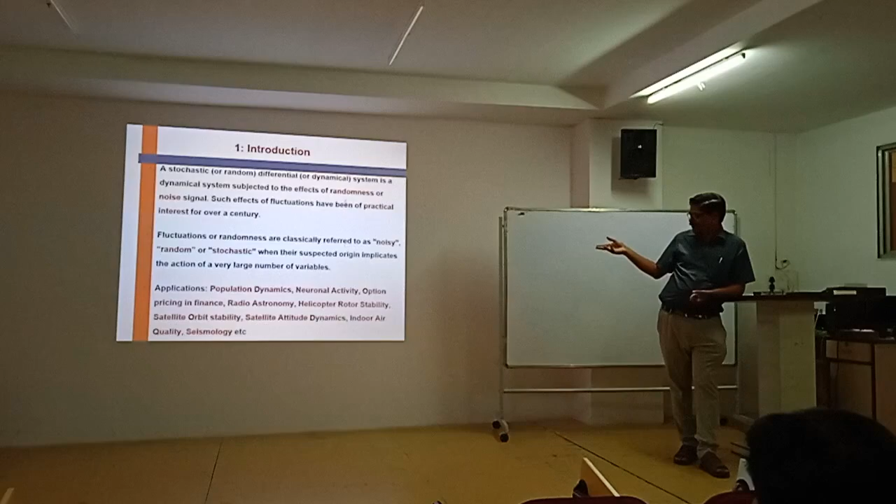Okay, maximum is pricing in finance. Other than that, all are technical, maximum technical things are there - astronomy, satellite, air quality, seismology, helicopter rotor, this thing. When anything related to finance comes, a person or human first attempts that or gets attracted towards finance. We are also there, we are also human beings, so we are getting attracted. So the first time there was fluctuation in the stock market.

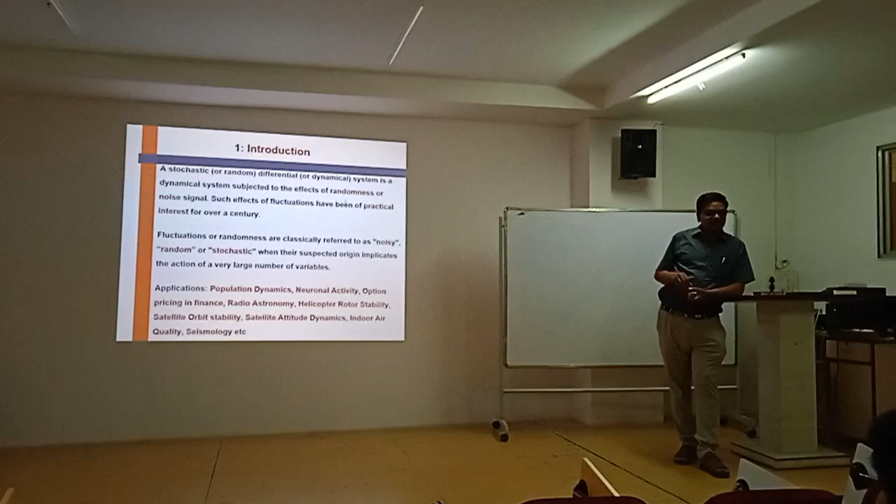So for predicting what will be the situation of Tata Power, suppose, or Tata shares in 5 years, depending on the previous fluctuations, one can estimate or predict this share will go to this and this value, from 900 to 1100 or 9000 or whatever. So again there is statistics, there is probability, everything comes along with this noise. And fluctuations are what? The variation around, suppose policies getting changed in India, or industry-related things getting changed, or leadership in Tata getting changed - these are all dynamical things which are disturbing the share market prices.

Are they right? So the first time this stochasticity was tackled or solved was by the Black-Scholes equation. Black-Scholes equation, and that got a Nobel Prize.

That equation is very popular to solve or to predict the share market prices, and that was analyzed by Black-Scholes. But the same thing was not done in technology because it involves very critical signals, but we have avoided that for many years.

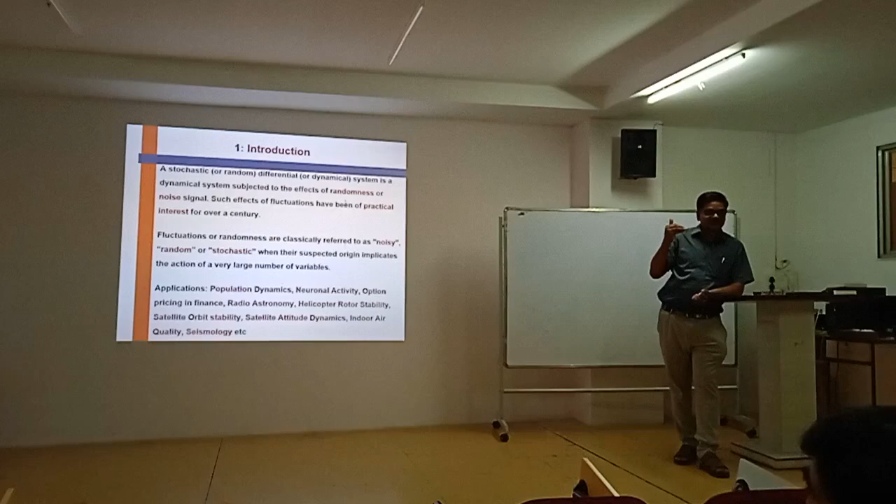And foreign people have attempted non-linearity, randomness, noisy signals from the first day only, because in their syllabus they are free to teach anything. On the first day only, they will say everything is non-linear, so try to solve. At least they are getting knowledge of basic things, and we have run away from them.

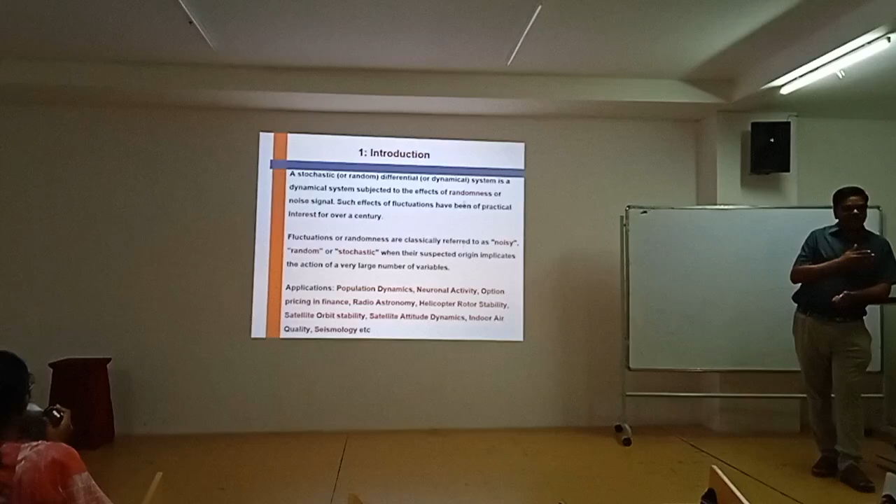Still, if you count, I don't know, hardly 20 or 30 people are doing research on this randomness in India. If you take the electrical community, when we were attending conferences, very few people were there. And in actual industry, people were working on noise.

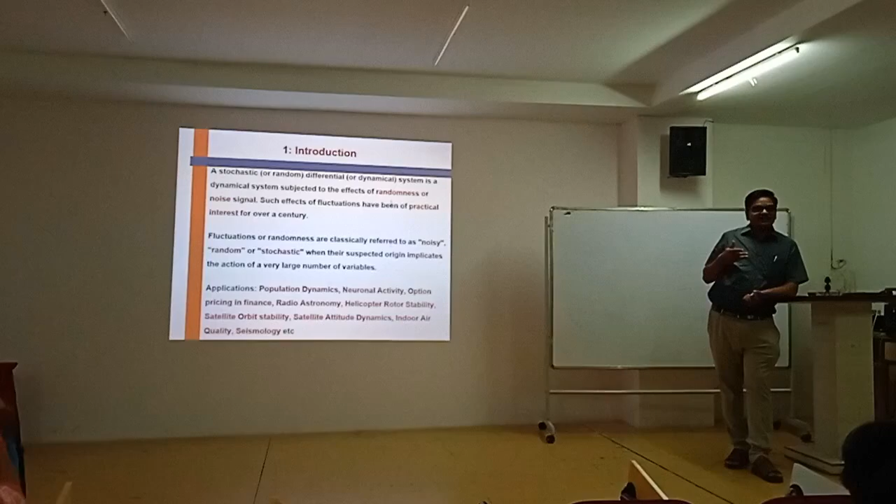Take an example: today also we are coming by car to the office. When high voltage lines are there, our FM radio is getting disturbed even today. Despite many electronic engineers being produced by India, they are going abroad. Still we are unable to solve this problem. Have you observed this? Yeah, still it is noisy. When we cross a high voltage line, the FM output gets disturbed.

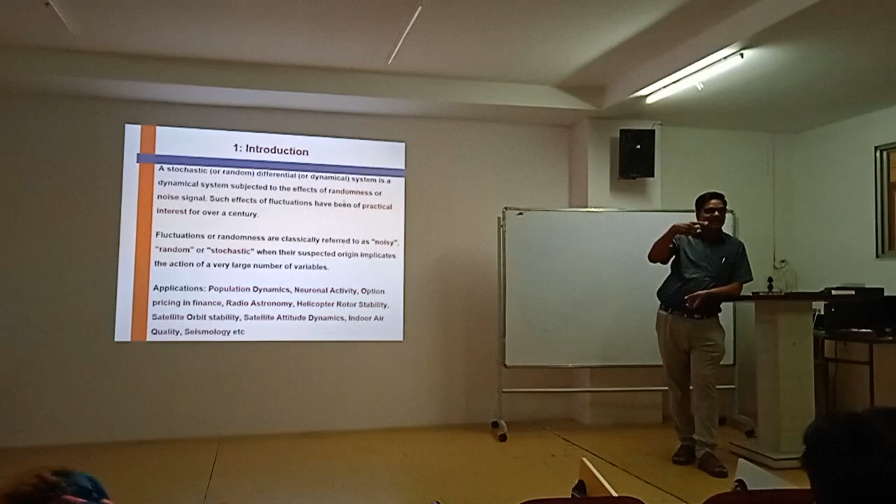Why is it so? We have not taken care of high voltage electromagnetic interference while designing the radio system, MOSFET based. I am going to cover one small topic on that. One paper was written on that MOSFET gate signal disturbance. So that challenge you have to take.

And what does industry want? How you are helping them to solve their problems. Here in teaching, faculty just have to complete the syllabus and all that, and our salary is getting deposited every month. But when students go, industry checks whether this person is helpful or not. Isn't it?

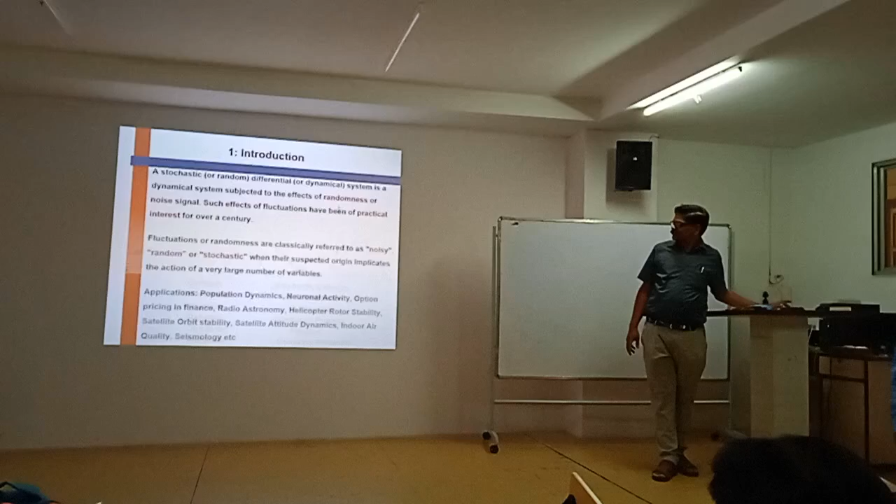Now on the deterministic signal, you can easily apply differentiation, integration. If it is discrete, then it is probability distribution things. If you take stochastic, then it requires Ito differentiation, Ito integration, then stochastic process with measure and probability. Something different. Now what is this Ito? Then more words will come: Stratonovich, Markov, Kolmogorov. Many scientists have attempted, but no one is from India. Ito is a Japanese scientist.

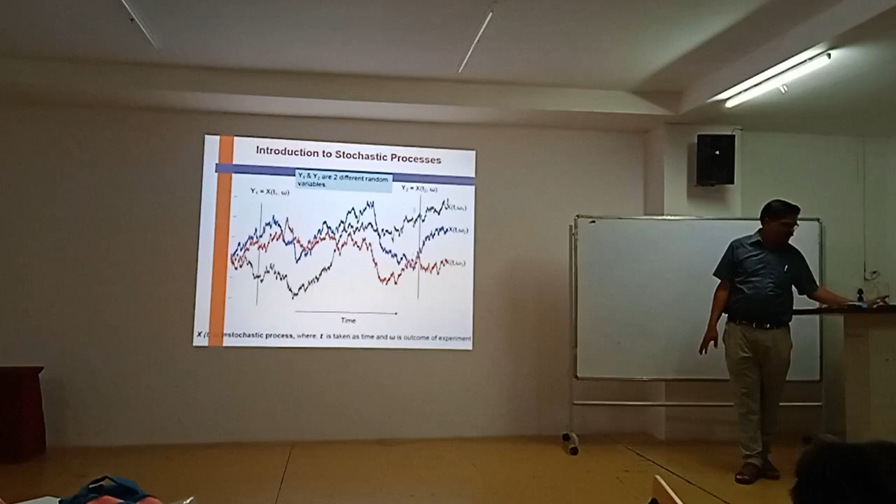Random variables. Now, check one book, Probability, Random Variables by Papoulis. In that you will find all this. That is the basic book behind this particular subject. It is basic in probability. This is the historical development.

Importance of randomness first. Introduction of the concept of Brownian motion, named after biologist Robert Brown. In 1820s, he noticed motion in tiny particles suspended within the medium of living pollen. I will give you a simple example. At night, a street light is focused in some shape, but you will see small particles moving. Whether that particle movement is linear or in a particular format, going straight, it is random. You can easily visualize it.

He had the same fundamental. So you will find that one particle will have a random travel path. It may turn right, it may go down, it may go up. Where it will go, we don't know. So that is the basis behind Brownian motion.

Then Albert Einstein worked on Brownian motion in 1905. That was just an observation that the motion is random, and it is called Brownian motion. Because something should be there, and on that the next one will start. So Albert Einstein in 1905 worked on Brownian motion as part of his kinetic theory and also on transition probability density theory.

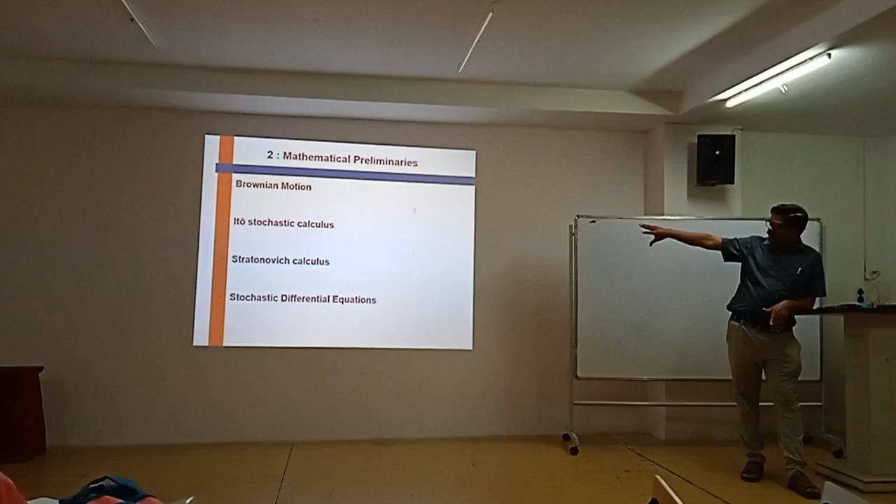This is mathematical, but I will show a picture of how SDE is developed, like linear differential equations, how SDE is formed. Brownian motion is the base. Then stochastic calculus. Then Stratonovich calculus. Stratonovich developed a somewhat different calculus than Ito. Most things are the same, but some formulas, the table, are different. And then last is stochastic differential equation. For solving this SDE, we can use Ito or Stratonovich. Those are the available methods.

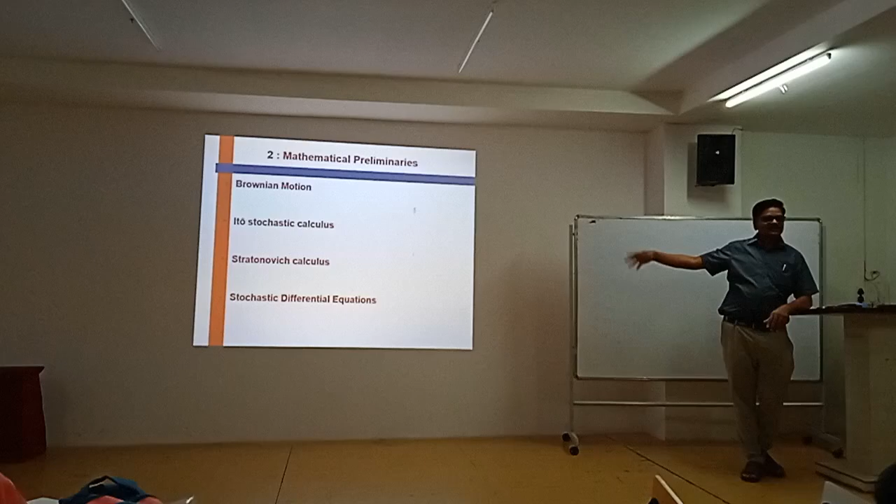This is again some mathematics. Brownian motion is the unique process with the following properties. No memory, means nothing is stored in it. So if you take B(t1) minus B(t), the next difference with the previous one, they are independent. Those small distances you can check, B(t1), B(t0). That is Brownian motion. Then invariance: the distribution depends on the gap time t. And continuity. These are the properties of Brownian motion.

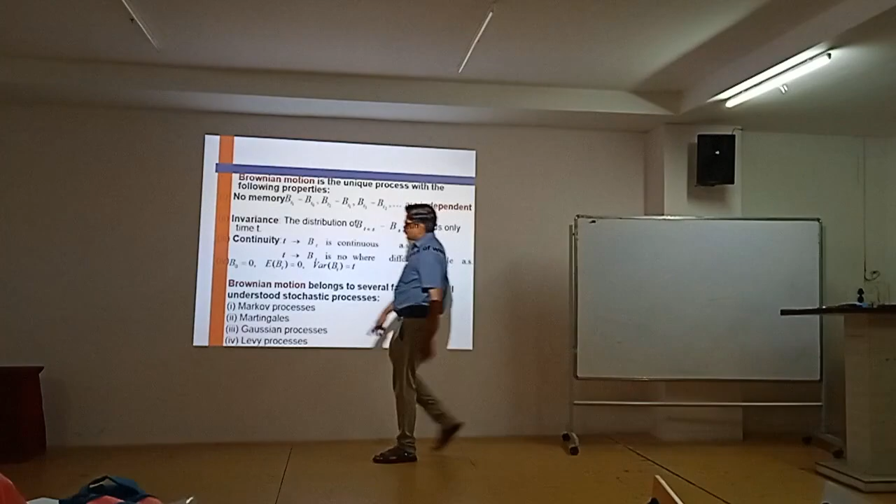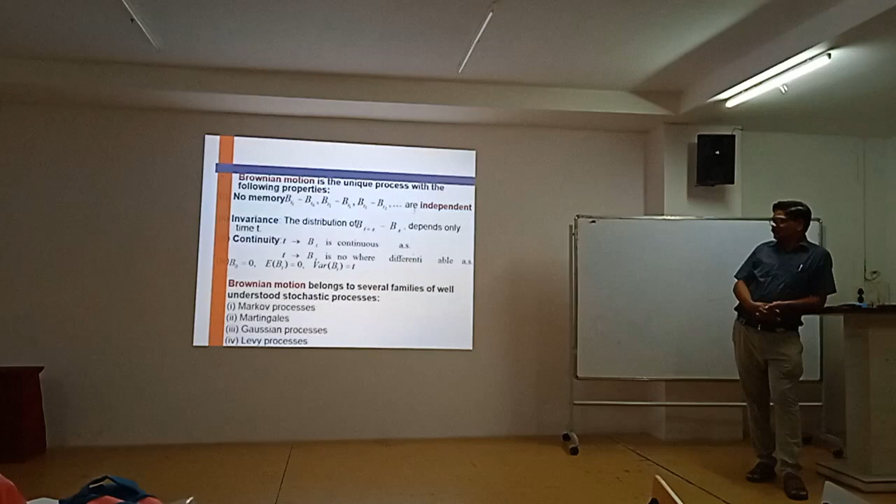It is very important. B0, the Brownian motion initial point, is 0. Then the expected value of Brownian motion is 0. The variance of Brownian motion is t. This is the base for solving those particular equations. Now Brownian motion belongs to several families of well understood stochastic processes. You have heard of Markov processes. Gaussian process is very famous. Have you heard of Gaussian process? In probability theory you might have heard this. Then Levy process.

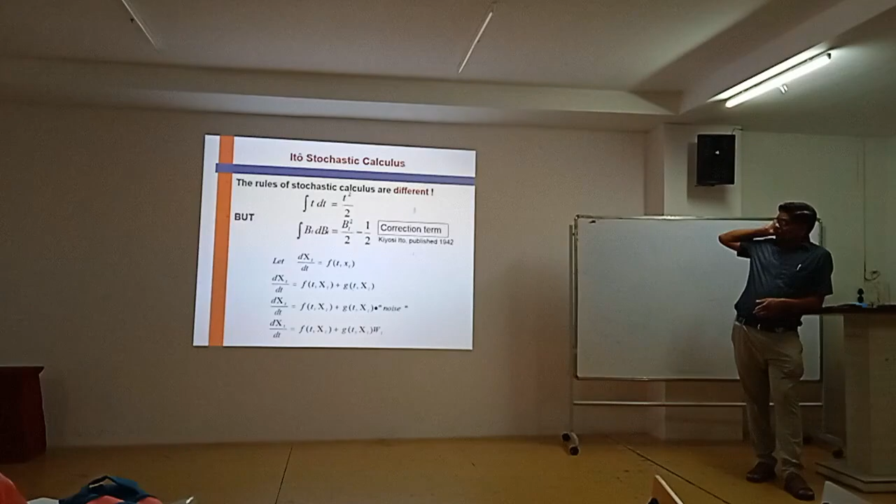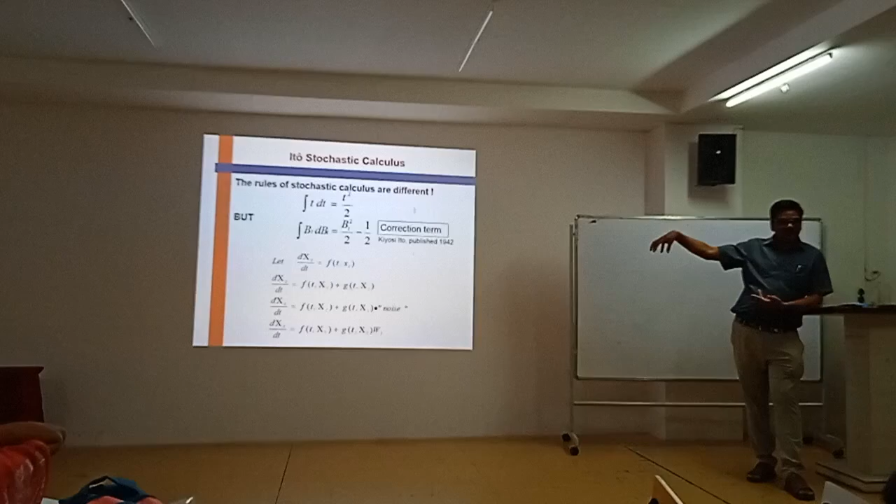Now it is Ito stochastic calculus. The rules for stochastic calculus are different. As I said, if you take the integral of t dt, then it is t squared by 2. But if you take B(t) dB(t), it's with reference to Brownian motion. Because what is the base for our stochastic calculus? Brownian motion. Brownian motion is related to randomness of anything. We have to take anything with respect to Brownian motion. So that is B(t) squared by 2 minus t by 2. This is the correction term added by Kiyoshi Ito, and based on that the stochastic differential equation is formed.

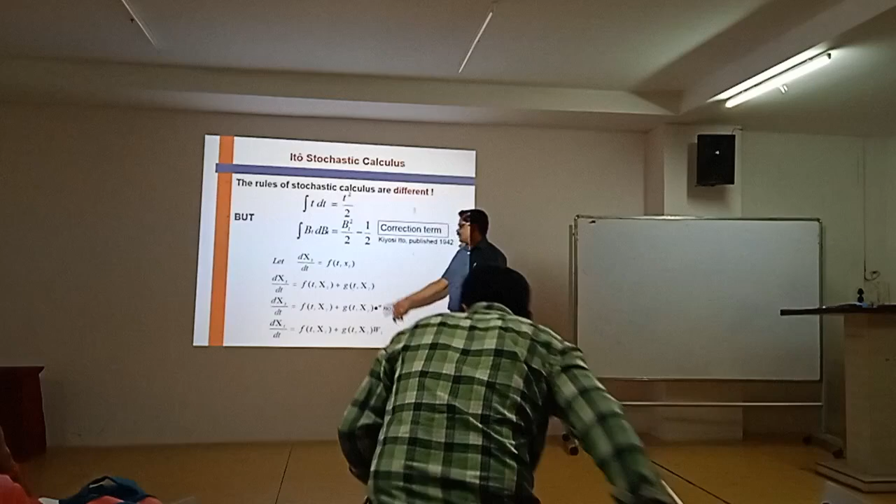If you take the derivative of any process xt, then that is a function of t comma xt, and then that is rearranged. If you take f, and this g of t is added, then dXt by dt comes in as f(t, xt) plus g(t, xt), and it is getting multiplied with noise. Noise comes in the picture. When noise comes in the picture, no one can apply conventional calculus. Our pen stops there. Any mathematicians that are interested go on, but everyone stops here only.

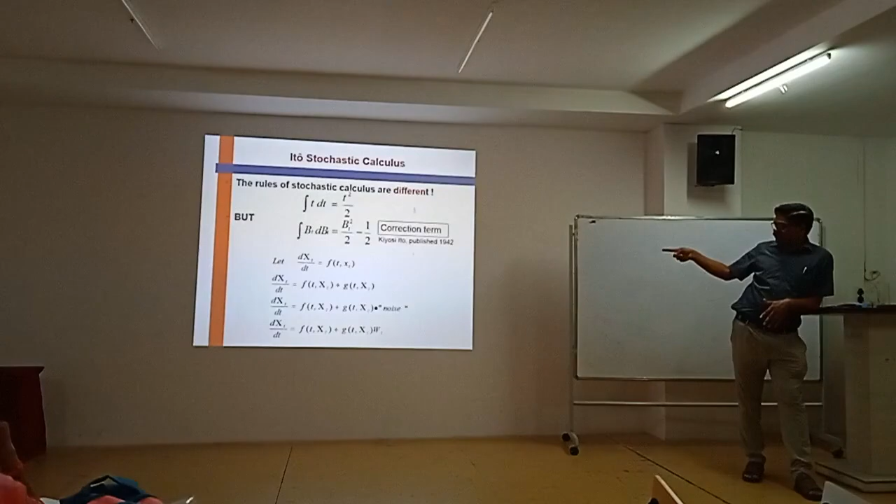And after getting this noise, it is getting multiplied. That is what we are mentioning with Wt. Now once that dt is on the right side, it takes this form: dXt is equal to f(t, xt) dt plus g(t, xt). The f and g are the coefficients. We are having a function of this. G is also a function, but the notation is given differently.

White noise, that is Wt, is the derivative of Brownian motion. Derivative of the Brownian process, dBt by dt, that is white noise, where Bt is the Brownian motion process. So dBt by dt is replaced by Wt, and if you replace that white noise Wt in dBt form, then it is called dBt. What have we done? We have added white noise.

You are aware of white color and colors. White is the same, that is, having only one ray, white. Others are with different colors. They are having other things. Okay. Why are two functions there when you take that differentiation?

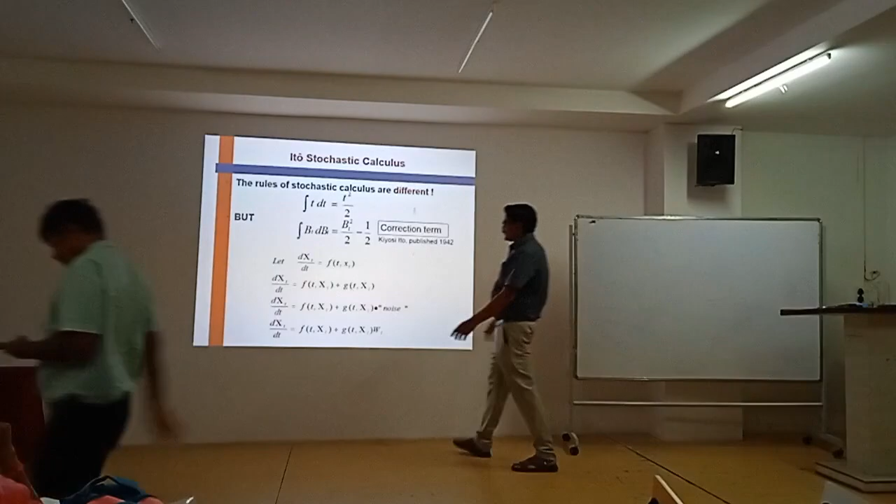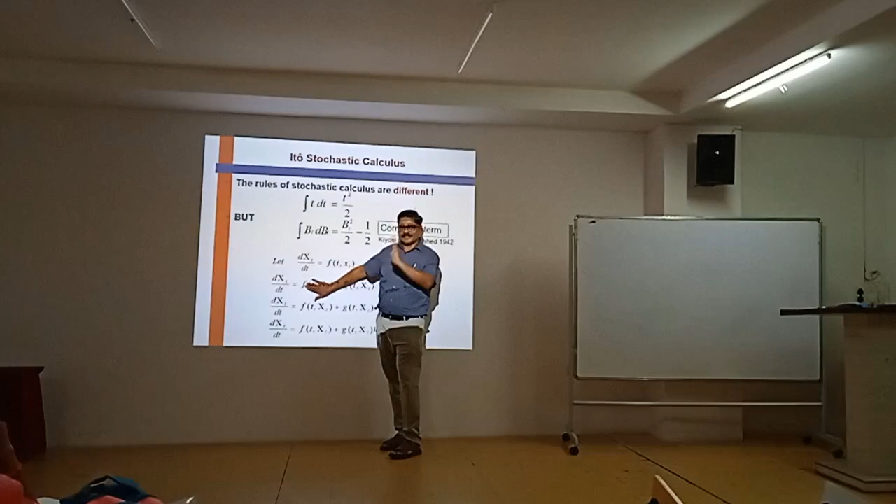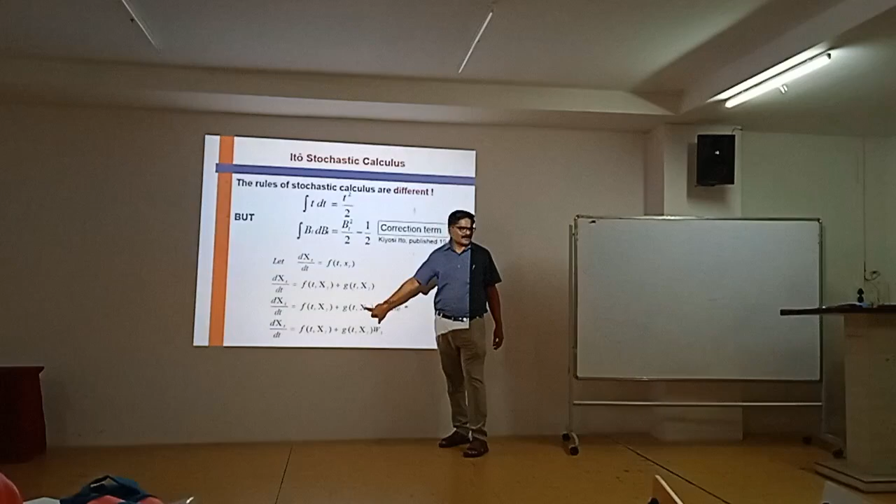Just see, there is a function. We have to take something which is affected by noise. This is the linear thing. This is one of the parameters which is linearly dependent. This relation is linear. But if you have to add something non-linear or noisy, where will noise come? If this comes, then this is 0. Some component will be without noise and some will be with noise. And to have a combination of both, we have this second function where noise is related. All of you getting it? Here noise comes in the picture.

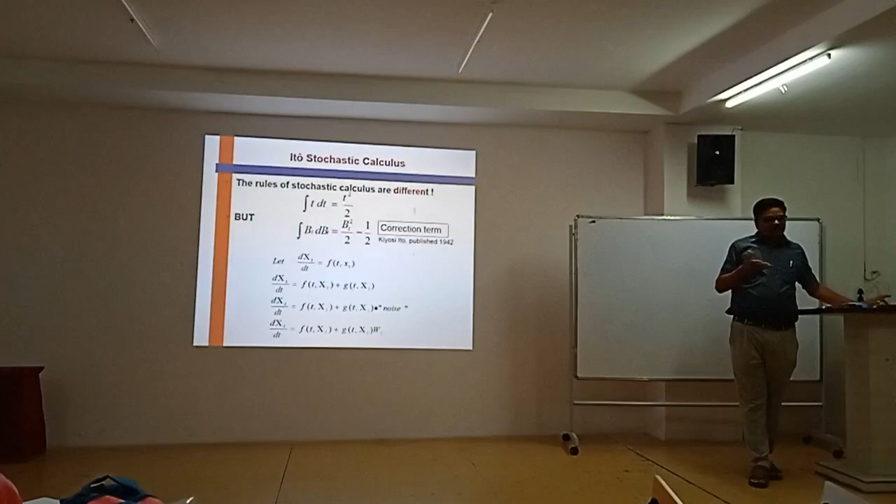So we are considering white noise with a single frequency, you can say. For example, if we are taking wavelength, then it is a single one. Is it clear? Many times the first function comes as 0 also, because only noisy signals are there, only noise is there. So white noise is the derivative of the Brownian process, and that gets the reverse form. We are adjusting that dt on the right side. So Wt dt is replaced by dBt.

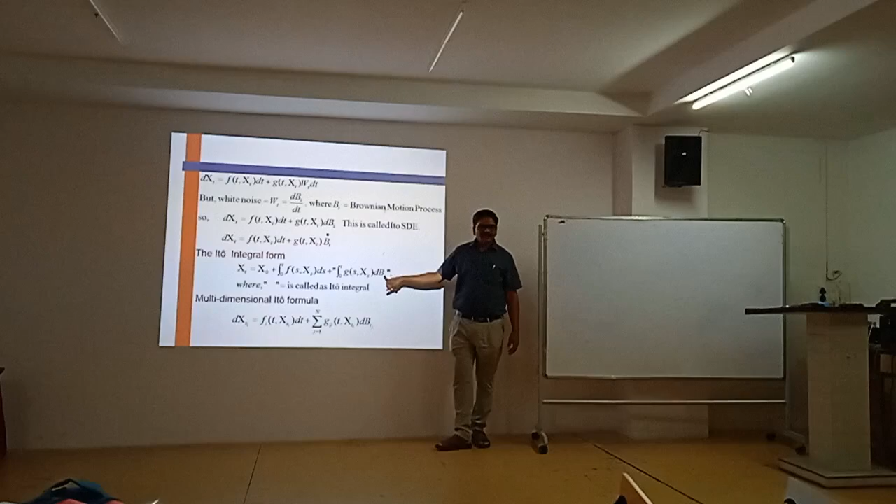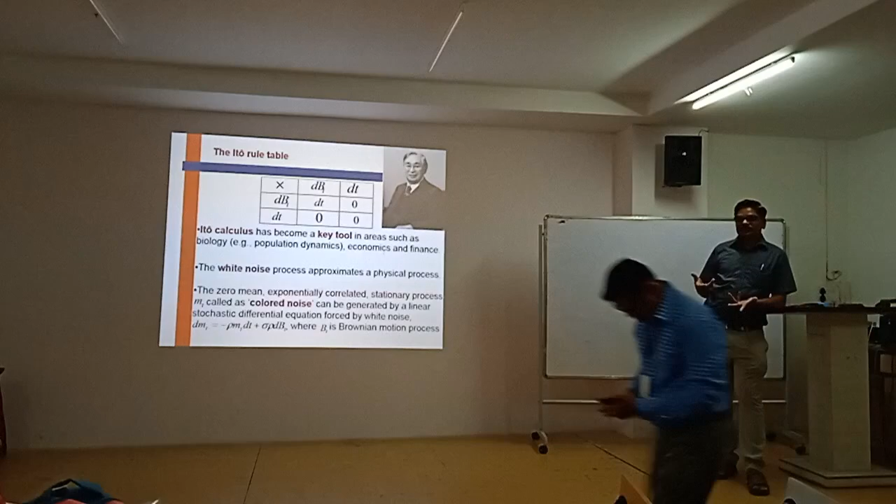Because dBt squared comes as dt, solutions come, and closed form solutions are possible. And then we are getting equations that are closer to our actual ones. We cannot say it is perfect, but at least it is better to consider these noisy signals instead of not considering them. It will give some randomness effect or various parameter effects on the system. Now this Ito calculus of Kiyoshi Ito has become a key tool in areas such as biology, economics, finance.

The white noise process approximates a physical process. Then a zero mean, exponentially correlated stationary process called colored noise can be generated by a linear stochastic differential equation driven by white noise. Again, white noise will generate the colored noise with different wavelengths. In practice, we call it that. Just like a prism: on one side of the prism one ray goes in, and then you are getting a spectrum. So this is white noise, the Brownian process, for colored noise.

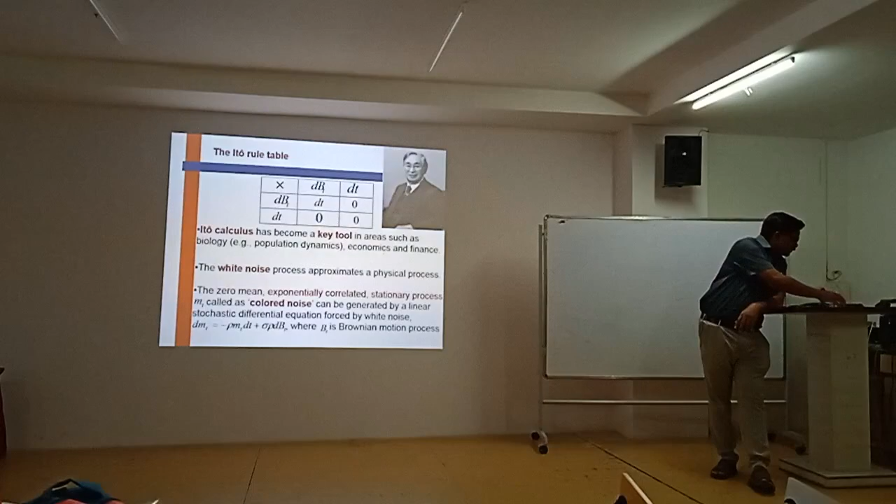Then again, one more scientist, this is Stratonovich. Like Ito, he has developed something different, and that is, he proposes a new symmetric definition of the stochastic integral. The Stratonovich integral is defined for a much more restricted class of functions than the Ito integral. Here in the evaluation, again, a small change is there. You will find Bt minus Ba is there. Again a small integral; he has considered that.

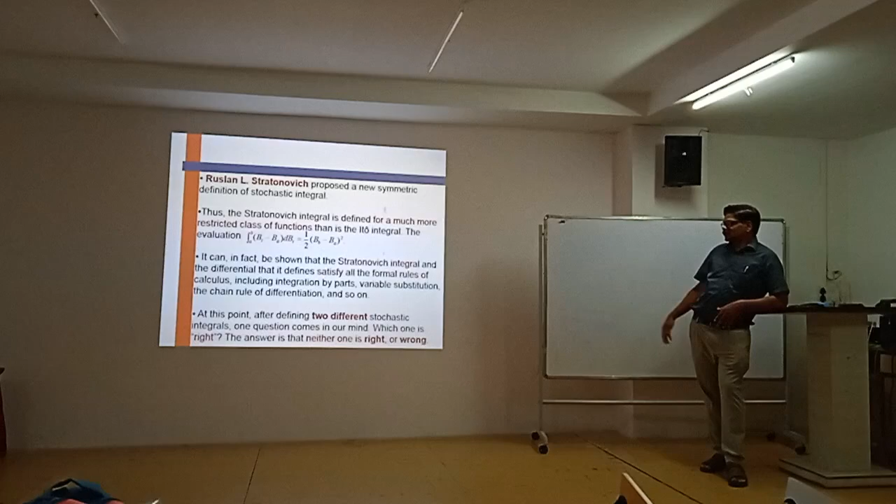After defining two different stochastic integrals, which one is better, or which is right or wrong? Both have their own merits and demerits. So some have attempted Ito calculus solutions, some have attempted Stratonovich. I will skip this, it is more mathematical. Just keep in mind the master equation, which defines the evolution of the conditional probability density for given initial states for a process.

You can continue with this because I have given them one discussion paper of Sharma Patil theory; they are aware of it. But you tell me, because we were also new at that time in PhD. Sharma sir is my guide. I was the second student, then he came, and then more students. So if you go through the paper in one reading, two, three, four, five readings, whether you are getting something, frankly speaking, it is very difficult.

Because only when the left hand side comes to the right hand side will you be satisfied, and only then will someone rely on you or keep faith in you. If you prove that the left hand side is equal to the right hand side, then people will salute you. Otherwise, anything I am talking, no one will believe. Because everything should be in mathematics.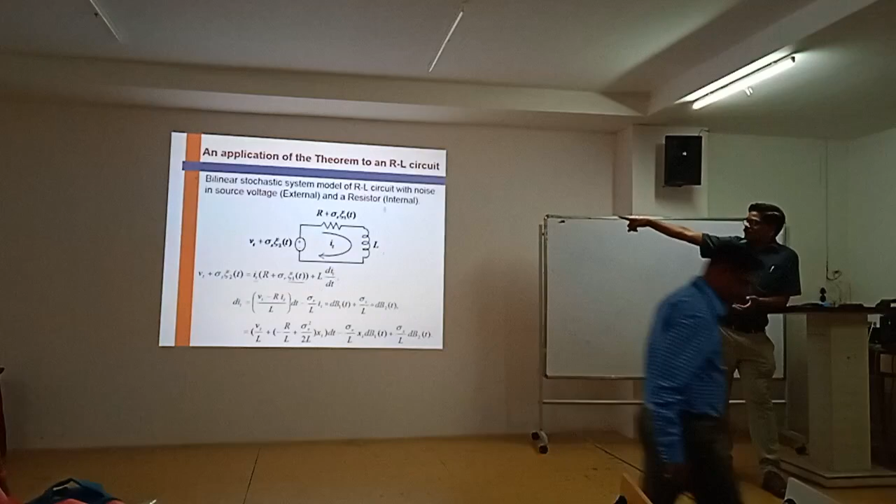So that we have considered as an internal noise, and the other is the source, because the source is also getting fluctuated depending on the circuit. We are not using very high and sophisticated sources, maybe our lab sources. If a battery is there, there is also disturbance of noise. So we have added this sigma s and sigma r. This is the coefficient for the noise strength, and zeta 1, zeta 2. This is added in r plus this. This is the variation. Okay, Vt plus this.

Now our simple Vt will get modified as Vt plus source noise, sigma s zeta 2. In the bracket, r is replaced by this variation, r plus sigma r zeta 1t, plus L di by dt. For the inductor, we are considering L pure, because at a time we cannot take noise in all components. We have to first take noise in the resistor, then by keeping the resistor constant we can go for inductor noise. So we are considering there is no noise, so L is pure.

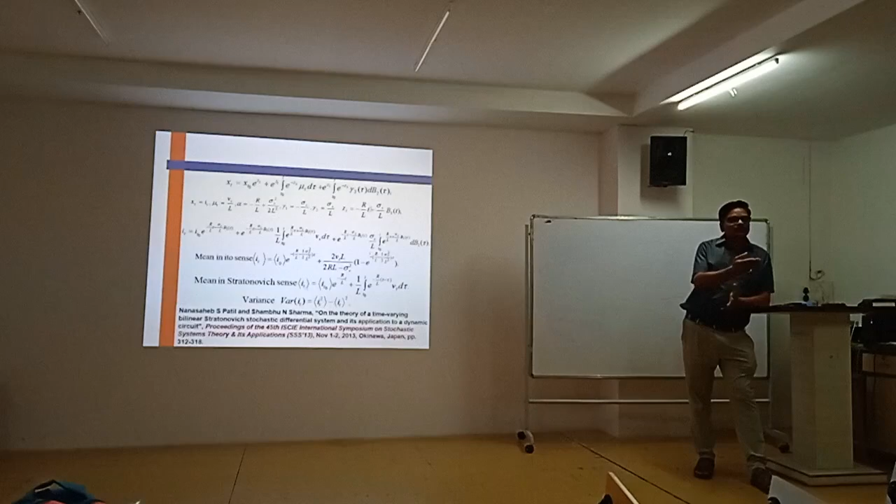Any doubt or curiosity on this circuit? This was my first attempt to solve something. When I entered research for my PhD, I was not able to pronounce stochastic correctly. So from that we came to this first formulation, and I applied this equation in MATLAB. MATLAB has all this toolbox; you can easily generate a random signal. That random signal, along with intensity, is given to the system, and that was simulated. So this is the analysis of the RL circuit.

Then another example is the electronic half wave rectifier, a famous one. Again we have considered here. This is a simple half wave diode circuit with one diode, a silicon diode, PN junction diode. This is conventional. Then again, when any parameter exhibits randomness...

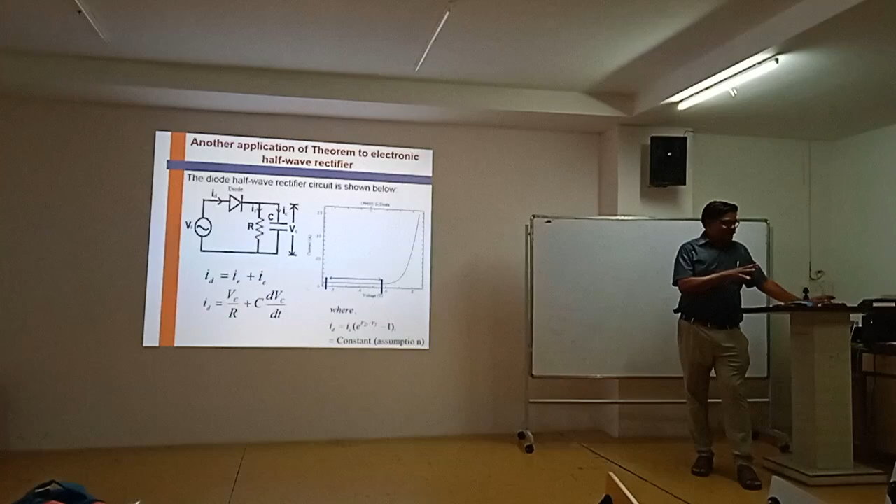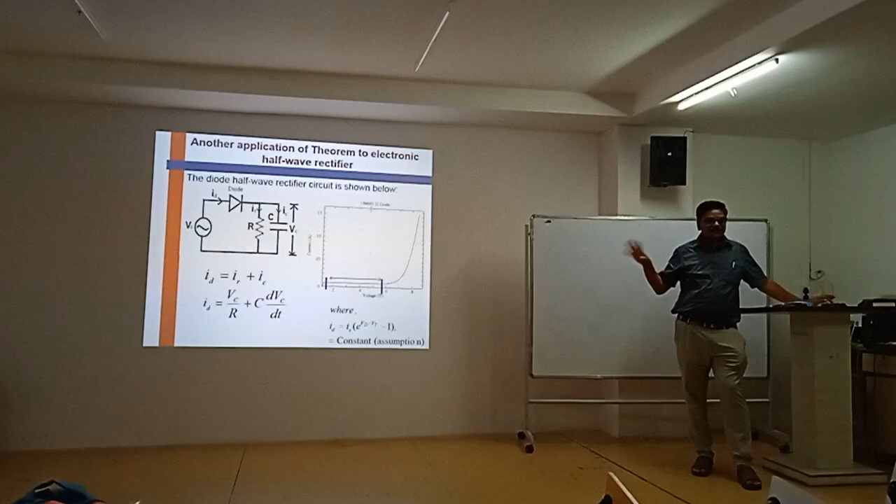People are not aware of that, so one can easily do some research here. This formulation is important; we took four to five years for understanding these basics. Still we are in the same place, the same basic calculus things. Now that has been converted into this.

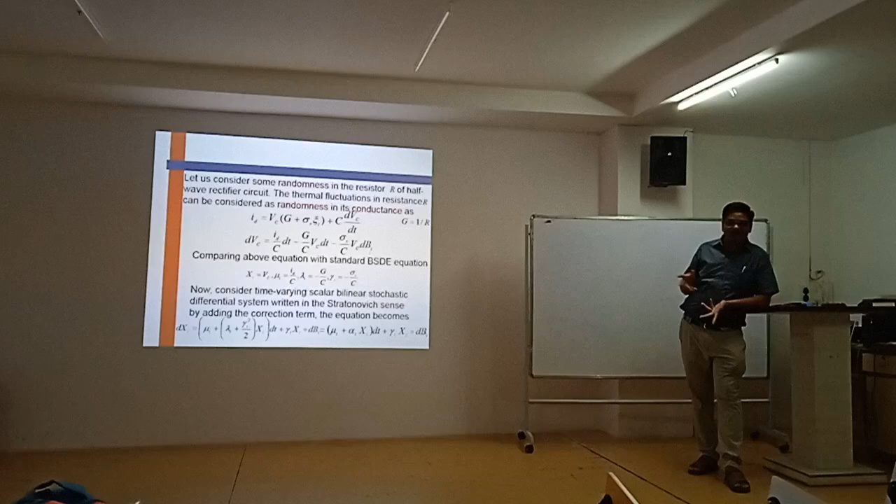If you check, let us consider some randomness in the resistor R of the half wave rectifier, and noise is due to thermal fluctuation in the resistance. As we discussed, there is some temperature change, then the value of resistor will change, resistance will get changed. Here 1 upon R is replaced by G, conductance, so to simplify instead of writing 1 by R many times, we use G, and here that comes in the form of dVc.

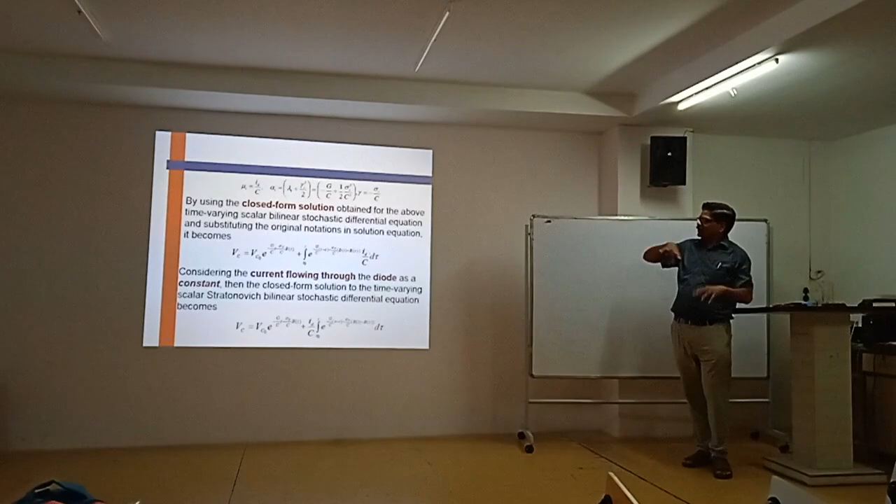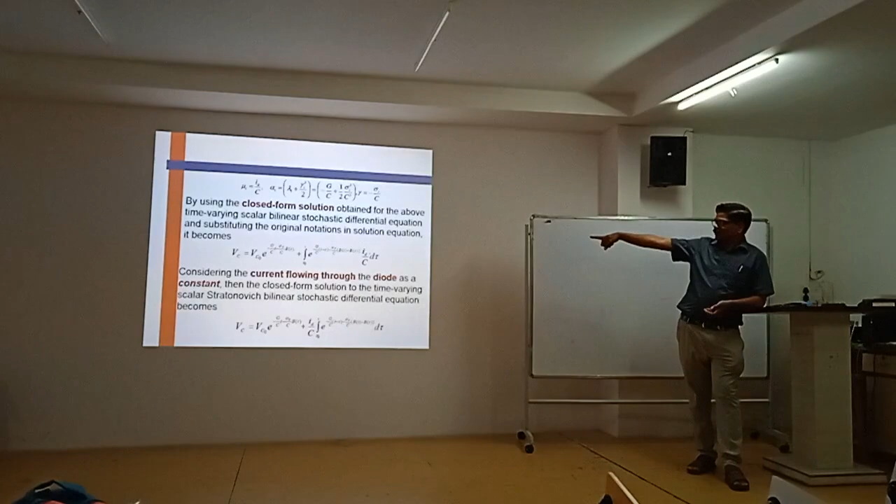Then, to avoid complexity in notations, we gave another notation for writing that, and by using closed form solutions, which is conventional, once you get dVt it becomes dt, and you can apply that. Taking the original notations and integrating, this Vc equation comes out.

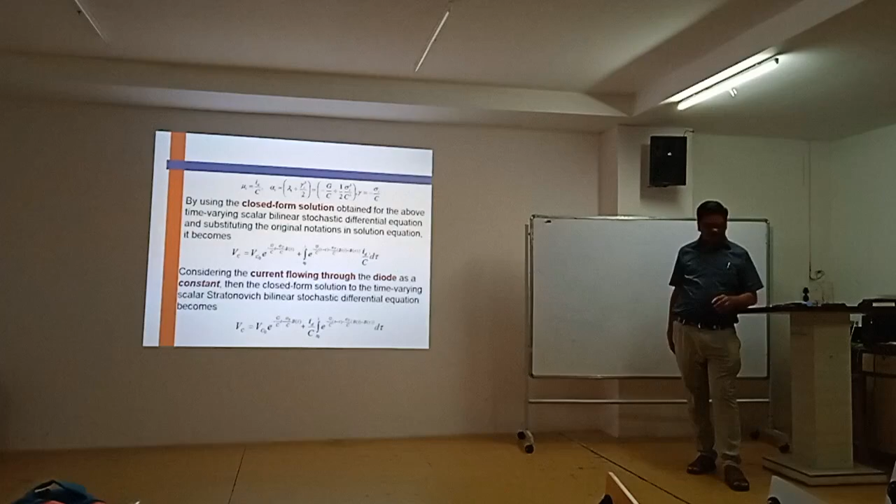Current flowing through the diode is taken as a constant. Again, at a time you cannot take many noise signals together; we have to consider one by one, and then all together you can analyze the system. This is the output. Again, mean and variance is taken, same variance, the expected value of Vc, that is nothing but the mean.

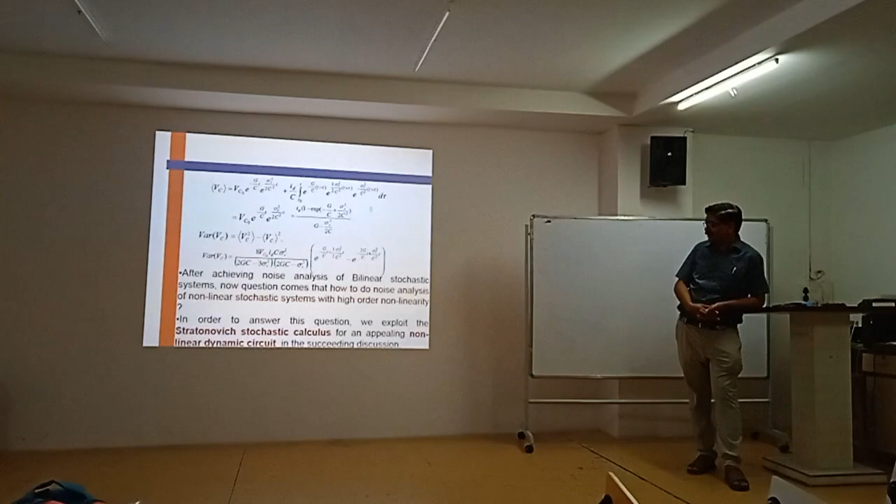After achieving this noise analysis of bilinear SDE, the question comes how to do noise analysis of a nonlinear stochastic system with high order nonlinearity. To answer this question, again we use Stratonovich. By adding this correction term, many problems were solved. But still people believe Stratonovich is just for simplification and Ito is for the basics, like that.

Different variations are there. If I believe in Stratonovich, I will go through Stratonovich's approach. If he has more faith in Ito calculus, we will go in that direction. Likewise, there is variety in the research world also.

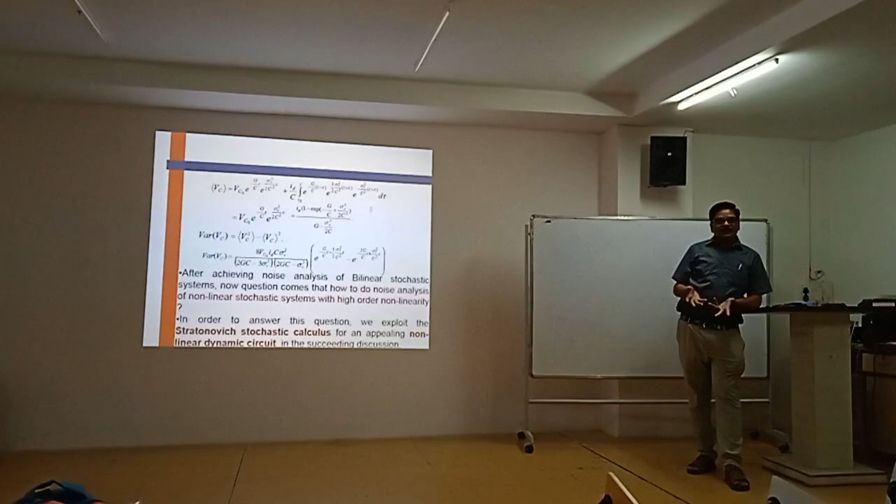Then, noise analysis of nonlinear stochastic systems. Just like our nonlinear differential equations, for nonlinear stochastic systems we have to consider all angles with the simple circuit, all angles: linearity, nonlinearity, deterministic, everything. So this is a famous paper, nonlinearity and stochasticity by Mumford.

I will explain that with the example. Here, the most important circuit part, as we discussed, is the radio frequency receiver. All of you are aware of MOSFET receiver. Have you heard how radio receiver works? It catches the RF signal and then converts it into audio. One of the parts is this RF receiver, and one important block is the sampling mixer. I will show you the block diagram.

It is the best example of a nonlinear stochastic differential equation system. It is desirable to perform front-end operations like mixing and analog to digital conversion, ideally on the RF signal, because radio frequency signals are coming, mixed, and then converted into digital form.

The universality of the sampling mixer, which is a non-trivial electronic dynamic circuit, can be found in interconnected systems, aerospace, wireless communication, and all. In digital wireless communication technology, the sampling mixer coupled with the A to D converter enhances performance. That is a paper that I have taken, and based on this, he has drawn some conclusions.

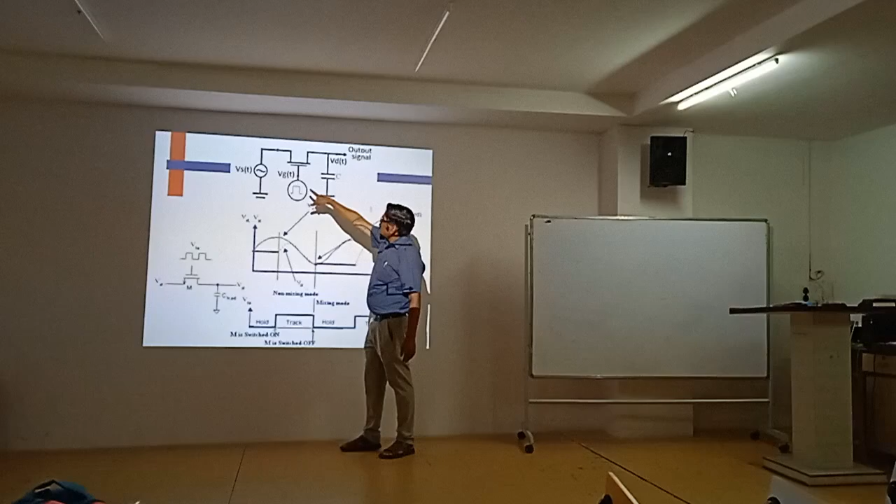See, this is a simple circuit. This is source voltage and gate signal. This is a square signal. Gate signal VGT and output VDT. So what do we consider? This is one of the first circuits in the RF receiver.

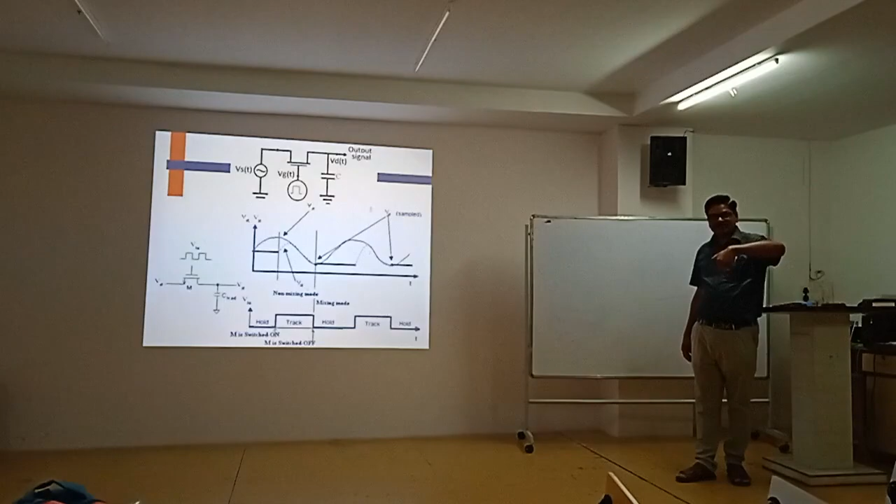Antenna is there, it receives the signal, it mixes the signal, and then all of you have heard of modulation and demodulation, strong and weak signals. If a weak signal is there, it is modulated to transmit over long range using FM and AM. FM is limited to small range and AM covers long range. In that case, one of the circuits is this one.

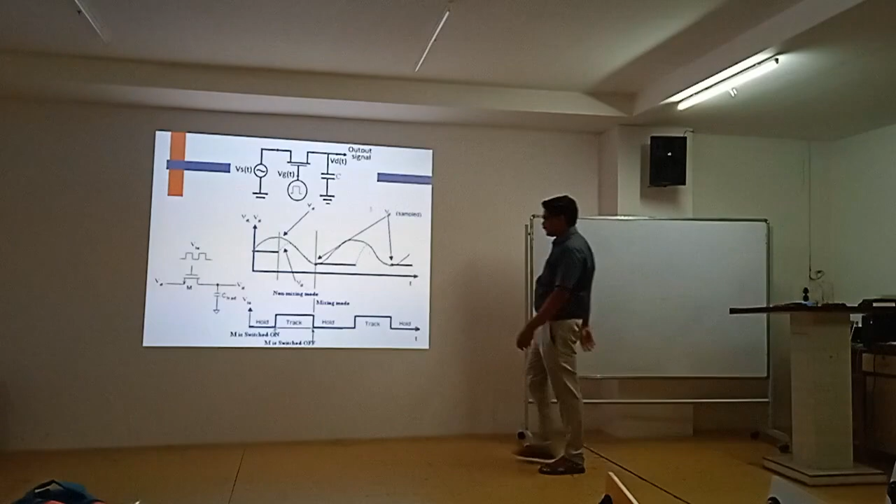So this is mixing mode, and non-mixing modes are also there. This is the simple working of that particular mixer in conventional form.

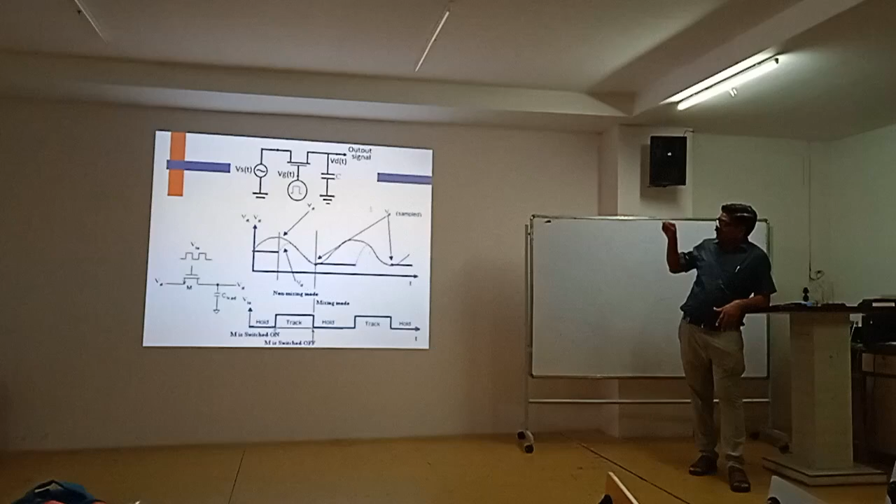If there is some variation at the gate voltage—what is gate voltage? That is the square wave we are giving, some 0 to 5 volts, or 0 to 2 volts, depending on the circuit. If due to battery temperature or battery variation in a car or anywhere that gets disturbed, then how will the output get changed? That we have analyzed mathematically.

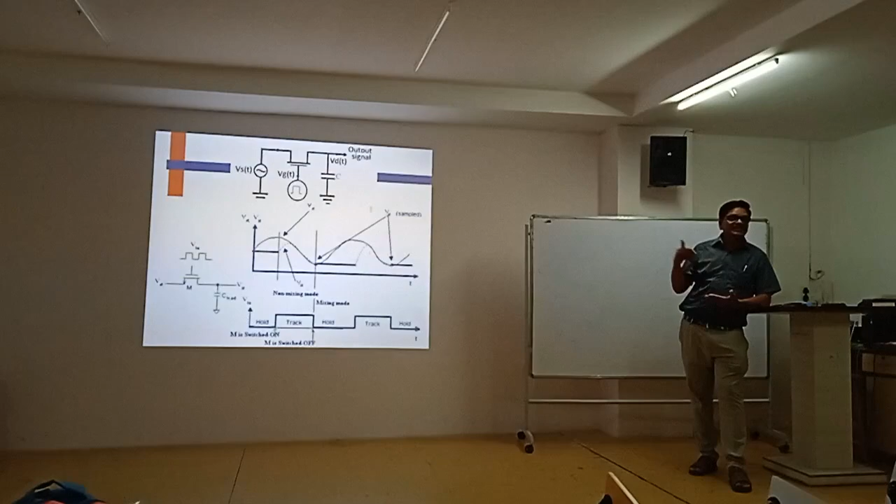Are you getting what is the aim or objective behind doing this analysis? It was that if some noise or randomness comes in the gate voltage, how will the output get disturbed. That was our motto or objective.

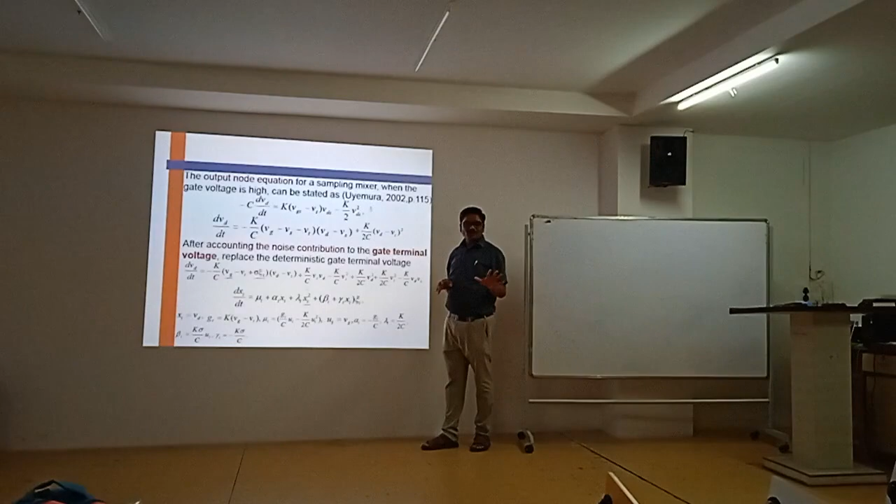This is the conventional sampling mixer's output differential equation—these are the notations—and then we added to it. I am avoiding the mathematical notation so as not to bore you, or if we go in depth again, we will lose interest in this topic.

So this accounts for the noise contribution to the gate terminal—GT was the gate terminal voltage. So we replace that deterministic gate terminal voltage. We get it with noisy signals, and that equation again comes with the intensity.

Here we intend to answer two questions: is it worthwhile to account for non-linearity in the noise analysis of dynamics, and will the stochastic method lead to better estimation over Ito's calculus. Then we studied the Ito-Stratonovich dilemma, and by adopting Stratonovich calculus, we arrived at this. That circle you will find is Stratonovich.

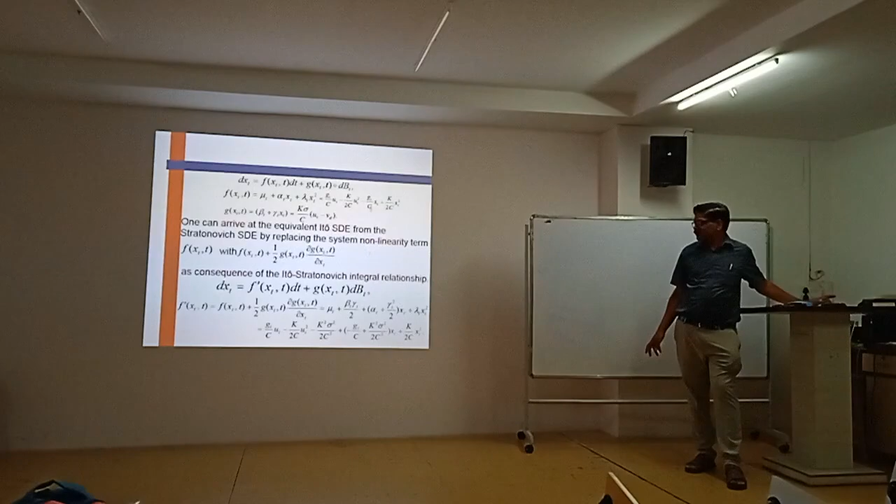What is the advantage and disadvantage of Ito and Stratonovich? That we have compared in this one. And this paper was published in the Journal of the Franklin Institute.

Since the closed form solution to a nonlinear stochastic differential system is not possible, no one can claim that this is the closed form or firm solution. We are going towards approximation.

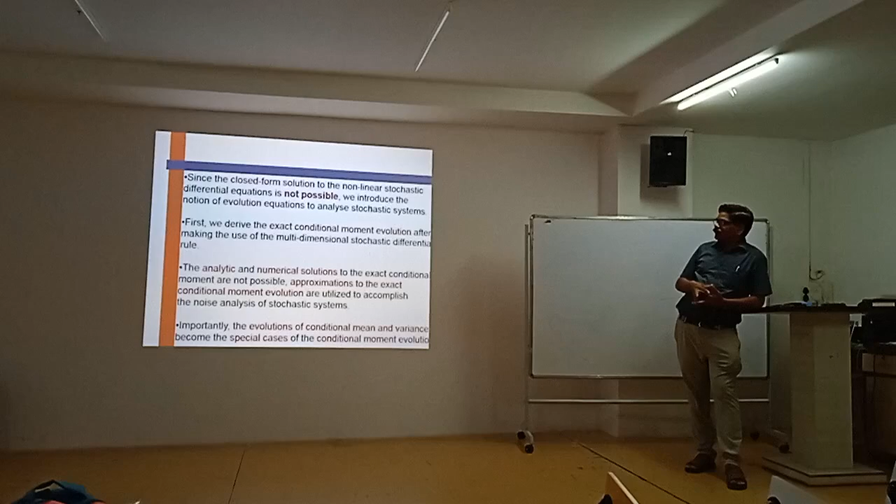So we introduce the notion of the evolution equation. Evolution equation means, depending on that parameter, it will get evolved—it is not constant, it will get evolved. Many forms will come; small changes will occur, and many forms will come.

So first we derive the exact conditional moment in evolution. There is a book on the evolution equation—I think sir has written that evolution equation book also.

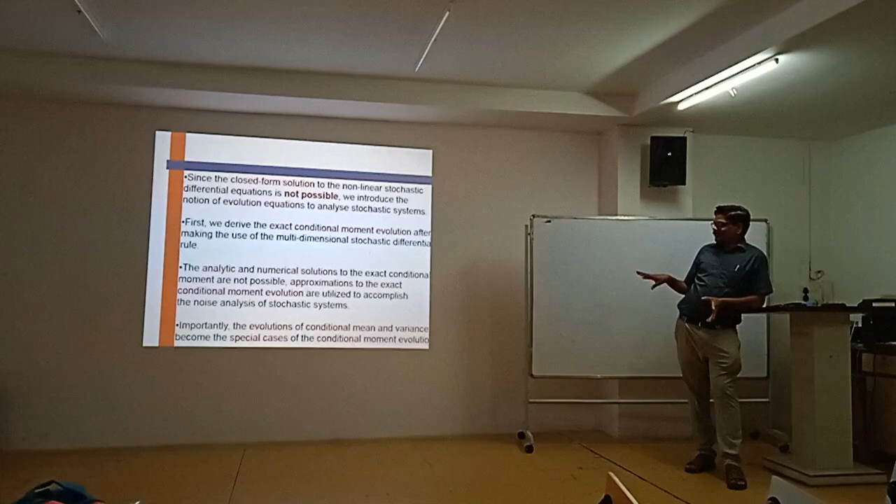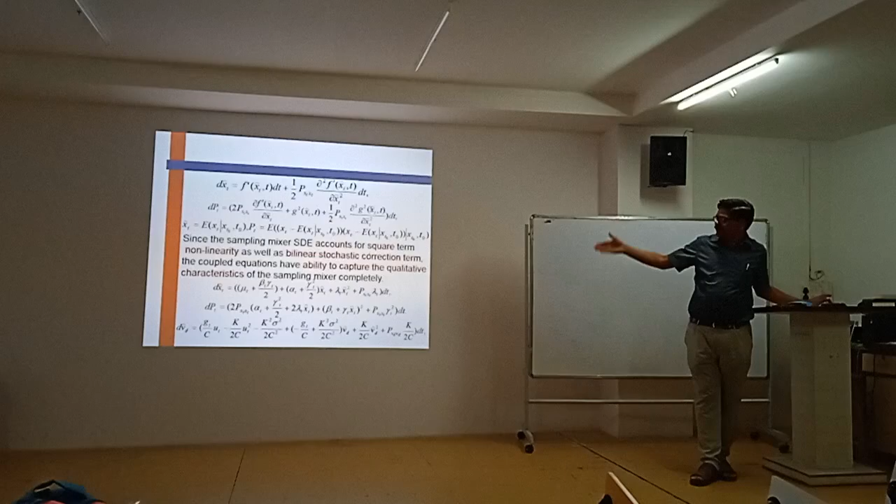Again, analytic and numerical solution to the exact conditional moment is not possible. Again, I am saying we are not claiming these are perfect, but we are going towards an approximation which will help us remove noise perfectly, or nearer to the values. Again, this is how we solve that—mathematically, we have solved this, using both Ito and Stratonovich.

This was the base paper. Uyemura obtained this equation, and based on that, our paper was published in the Journal of Franklin Institute in 2015, on nonlinear stochastic dynamics circuit using stochastic differential.

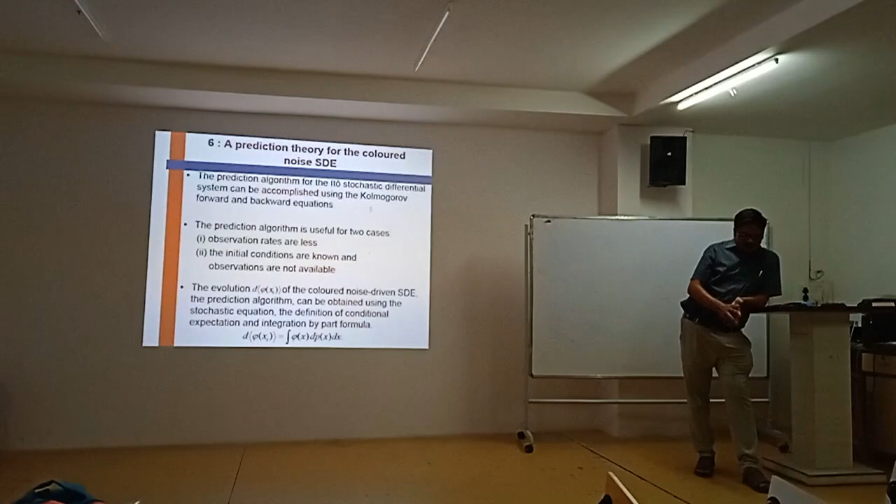Do something other than what conventions are doing. Then one or two papers in good reputed journals are sufficient on your name. There should not be numbers like 100, 200 or 2000. In our campus, one professor had the target of some 10 or 15 publications per month on his name, and our sir had only one or two in a year, but reputed. So to have good publications, that matters.

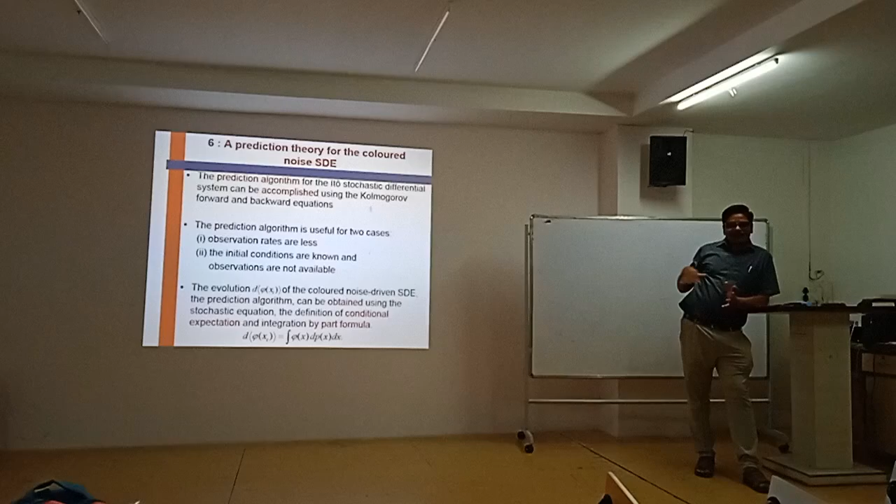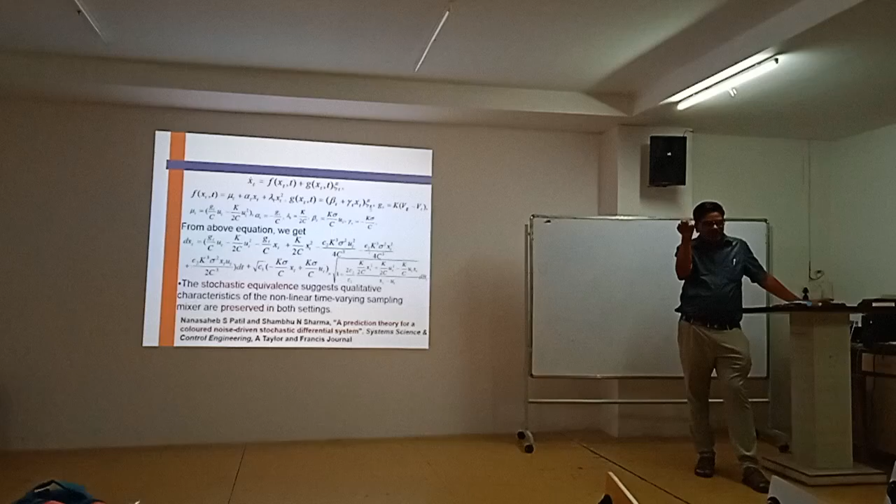Again, the same non-linear sampling was extended, because once you get some result, you can do further analysis on the same after getting the results. Here we have given colored noise as input instead of white noise. What is the difference? Because in research, what is happening? If you get one, then you make a small change in one pattern, write an article, then do the second one. That variation is also research, and in that you are getting good results.

So these are the results with the same value; we have considered sampling also. So this presentation has the conclusion which we have discussed.

Still this controversy is going on. I think Balaji sir's paper was there. They have written that the controversy is still there: who is better, Ito or Stratonovich. Instead of focusing on their results, we are in that process of who is better or which is good. That is correct, because we have to keep faith in one and then go in that direction. Otherwise, you will be in a dilemma. The same dilemma is there with Ito and Stratonovich also.

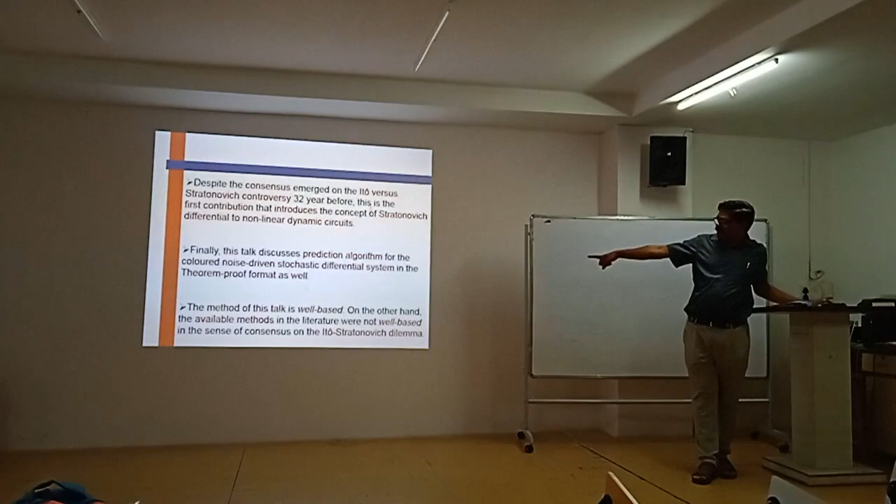Nowadays they are working on quantum stochastic theory. That is the latest topic. Those who are interested can have a good future in that. And it is not so that after PhD... what is the name? He joined in Bangalore after PhD. Prashant. He joined a company related to that. So it is not that you will only be in the technical field or teaching field. You might go into the research part of the industry segment also.